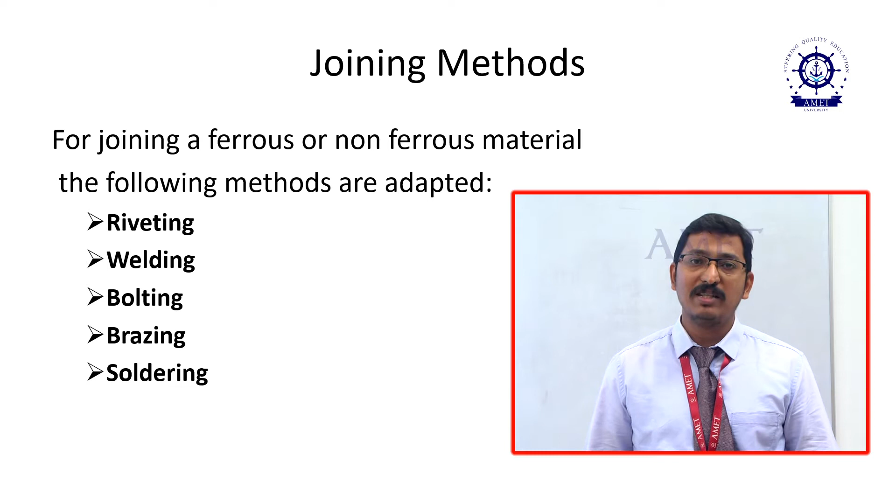Today we are going to talk about welding in shipbuilding. For joining ferrous and non-ferrous metals, we use different types of methods, such as welding, riveting, brazing, and soldering. In shipbuilding, the major common methods are riveting and welding. Before the 19th century, we were using the riveting method, where we overlap plates and use rivets to join two metal plates. But after the 19th century, we started using welding, which is predominant nowadays.

In riveting, the plates were overlapped where the rivets were inserted between the plates by drilling a hole. This is a more time-consuming process and takes more man hours. We were using rivets before the 19th century, and after that, we moved on to welding.

Welding has two methods. In the welding process, we join either similar or dissimilar metals using heat or pressure as a source. There are different types of welding. Before seeing that, we will compare the riveting and welding processes.

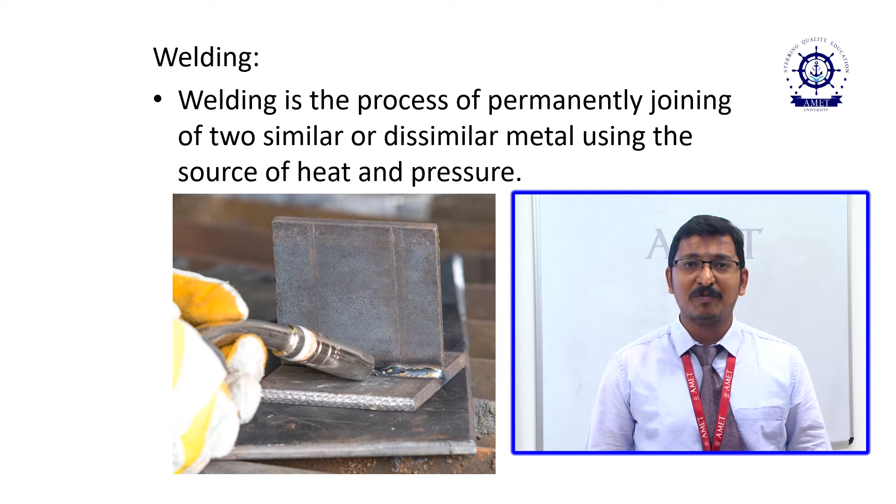In welding, unlike riveting, we do not require any connecting components such as gusset plates, so that we can reduce the weight of the plate. For doing welding, we require only one face. In case of riveting, we require at least two plates, two faces, and clearance between the weld plates.

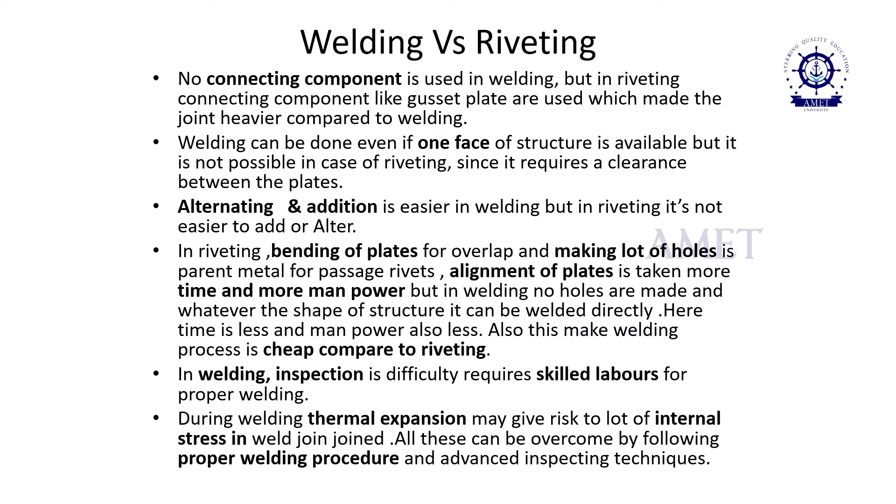So that you can do a riveting process. But in case of welding, only one face is sufficient, so you can weld in any different shape. And when you need to add or alter a weld plate, it is very easy compared to rivets.

But in case of riveting, we need to completely remove the rivet to do the alteration or addition. So for bending, making holes, and alignment, it takes too much time and more man hours, which increases the time and cost of building.

In case of welding, there is no need to make any holes, and it is less time-consuming for making the alignment. Thus, it reduces the time for joining of materials.

The next thing is, when you do inspection, compared to riveting, welding inspection will be tougher and more time-consuming, requiring skilled labor. So this is one of the most disadvantages of welding.

The next point is that thermal expansion in welding is more, especially in the weld area. To avoid this thermal expansion, we have to follow a lot of procedures. Once we follow the procedures to reduce the thermal expansion and stress over that particular area, welding is also an advantageous method for joining, especially in shipbuilding.

In welding, the major classification is solid state welding and fusion welding. When you see solid state welding, it is further classified into plastic or pressure welding and cold welding. Here the source of joining is heat and also pressure.

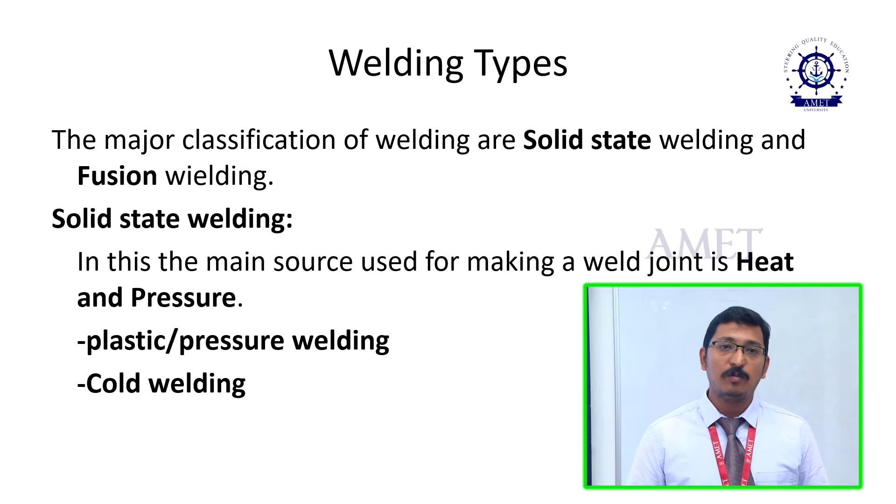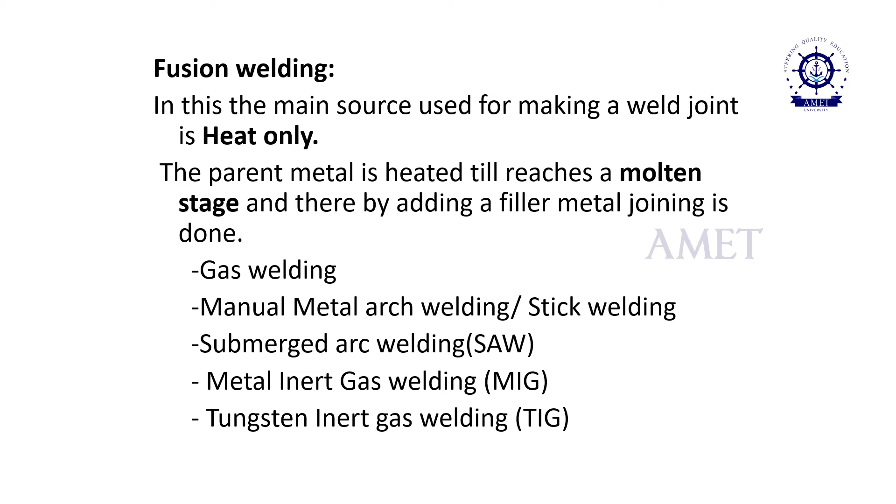As I told you, in shipbuilding, fusion welding is the most predominant method of joining we use. In this method, you heat the base plate till it reaches a molten stage, then by adding or not adding a filler metal, you can join two metal plates.

Further, fusion welding is classified into gas welding, manual metal arc welding, or sometimes called stick welding, then submerged arc welding, MIG welding or metal inert gas welding, then TIG welding, tungsten inert gas welding. These are the different types of welding we use in our shipbuilding scenario.

The first method we are going to see is gas welding. In this, the heat source is created by gas.

Generally two types of gas we are using, one is oxygen, another is acetylene. By varying the combination of these gases, we can produce three different types of flames: oxidizing flame, neutral flame, and carburizing flame. These are produced by varying the percentage of gases we use in our gas welding.

When you use a carburizing flame, you can weld some alloys such as aluminum alloys and steel alloys, these kinds of materials.

But using an oxidizing flame, you can weld something like brasses, bronze, copper. These are the types of metals where you can weld using the oxidizer flame.

Using a neutral flame, especially for shipbuilding materials, we can weld mild steel and iron. These are the types of metals we use for this neutral type of flame.

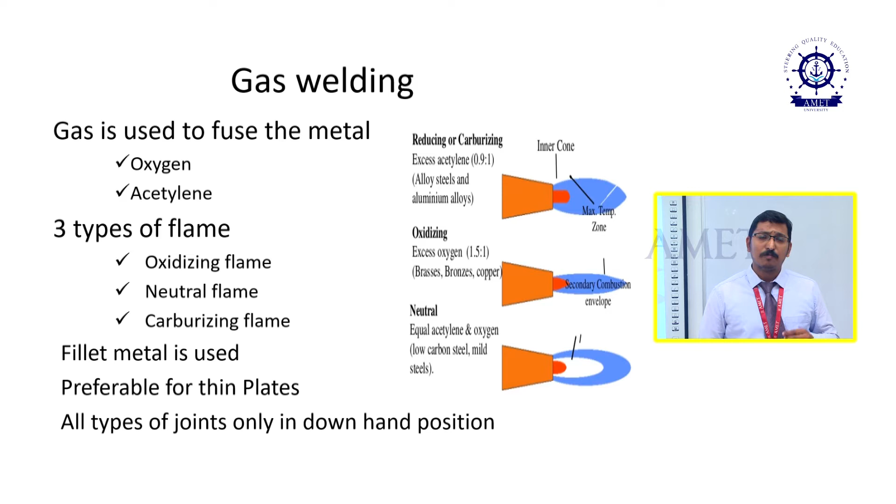We also use a filler rod for joining the metals. This type of gas welding is used only for thin plates.

The next type of welding we are going to see is manual metal arc welding. Generally we call it stick welding because we are using a single piece of electrode, which is also coated by a chemical.

This manual metal arc welding is a flexible method of welding used in shipbuilding, and it is completely manual, where the feeding of the electrode as well as the movement of the electrode is completely manual. So it is flexible, and it is one of the best methods of welding in shipbuilding.

The next type of welding we are going to discuss is submerged arc welding. The meaning of submerged arc welding is not that you are doing underwater welding. It means the arc is completely submerged into the flux. That is the meaning of submerged arc welding.

This submerged arc welding is fully automatic, where the movement of the electrode and the feeding of the electrode are both automatic. Also, compared to manual metal arc welding, a continuous coil feed of wire is supplied to the welding zone, so that you can continuously weld lengthy plates.

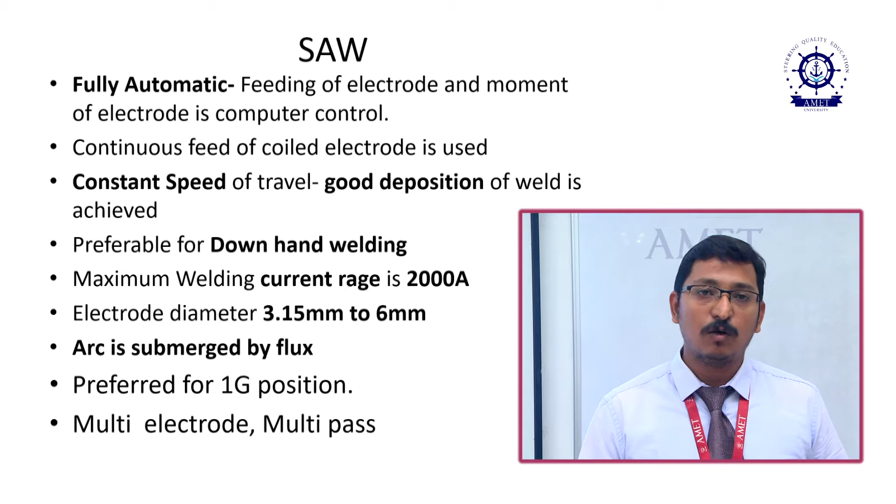That is the main advantage of submerged arc welding. Since it is an automatic type of welding, you can weld multiple passes in a single slot, which means you can weld continuously with different electrodes on the same plates. This is the main advantage of submerged arc welding.

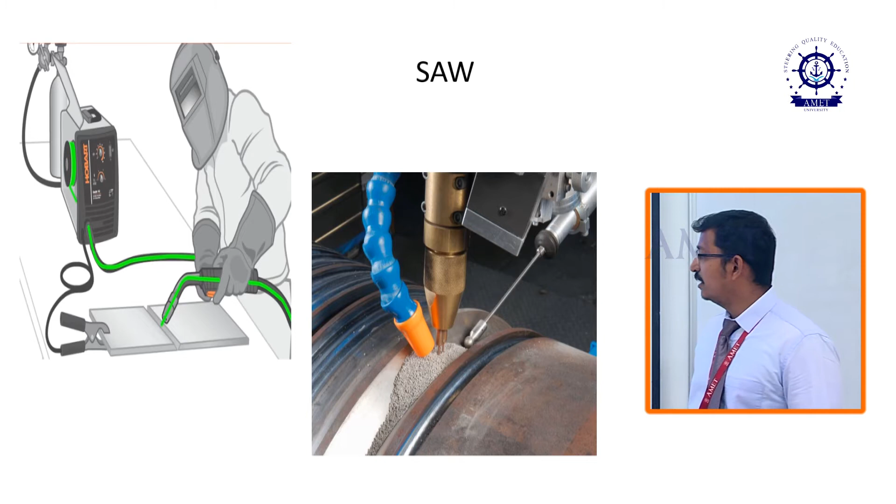Through this blue color tube, we can supply the granules of flux, and in between the center is the electrode we are using for submerged arc welding.

The primary purpose of flux is to prevent the weld bead from atmospheric contamination. The chemical composition of the flux present over the electrode will also help with arc stability. The amount of heat generation is directly controlled by this arc stabilization. The depth of penetration is also decided by the chemical composition used in the flux.

Then there's metal deposition rate, how fast the electrode is deposited inside the weld bead. Then positional welding capacity, at what position you are able to use this electrode. These are the various factors this flux influences directly.

For example, in different welding positions like 1G, 2G, 3G, some welding electrodes will support only 1G type of welding, while some other electrode types can support more than 2, 3, 4, or 5G. So this flux directly influences the metal deposition and penetration of the weld bead inside the plate.

The next welding type we are going to see is metal inert gas welding. By the name itself we can understand we are using an inert gas such as argon, carbon dioxide, or other types of inert gas to shield the weld bead from environmental contamination. This metal inert gas welding is a semi-automatic process where the electrode feeding is completely automatic, but the movement and travel of the electrode is manual.

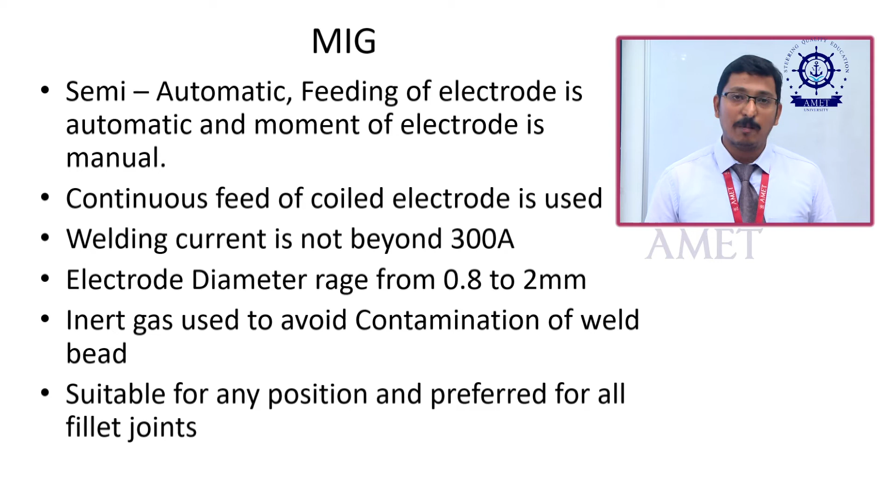The amount of current we supply for metal inert gas welding is about 300 amperes, and the filler or electrode rod diameter is about 0.8 to 2 mm. These are the metal inert gas properties.

The next type of welding we are going to discuss is tungsten inert gas welding. By the name itself we understand we are using a tungsten electrode, compared to MIG welding, SAW welding, or manual metal arc welding. In this type of welding the tungsten electrode can sustain a temperature of up to 3000 degrees Celsius. So the base metal will be melted, but the electrode will just be heated up. Generally we call this tungsten inert gas electrode a non-consumable electrode.

Tungsten inert gas welding is also a completely automatic method where you can weld different types of metals, not only mild steel but also aluminum, brass, and different types of similar and dissimilar metals. You can use inert gases like helium, argon, and carbon dioxide, but this method is comparatively very expensive compared to MIG, SAW, and other types of welding. But the only advantage in this welding type is that it is completely portable.

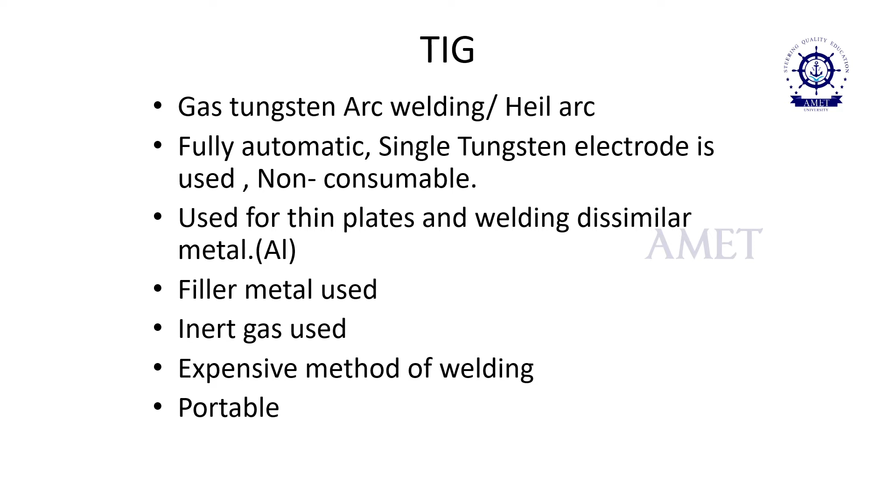When you compare all these types of welding—metal inert gas welding, tungsten inert gas welding, submerged arc welding, and manual metal arc welding—the best method we can suggest for downhand welding is submerged arc welding.

When you compare manual metal arc welding, that is metal stick welding, with submerged arc welding: in manual metal arc welding we use a single piece of electrode coated with flux, but in submerged arc welding we give a continuous supply of wire feed, which also has a chemical coat over the top layer of the electrode.

In both cases, current helps melt the electrode, and the base metal gets heated up so that the electrode melts and deposits over the base metal. This is the procedure in both stick welding and SAW welding.

When you compare MIG welding and TIG welding, in both cases we use an inert gas, whether carbon dioxide, helium, or argon. But in MIG welding we use a consumable electrode, while in TIG welding we use a non-consumable electrode. These are the main differences between these different types of welding.

Now we are going to look at welding positions. There are different types of welding positions we use. 1G is a downhand welding position where you hold your electrode towards the ground—consider this as the electrode, you are holding it towards the ground. This is the 1G type of welding.

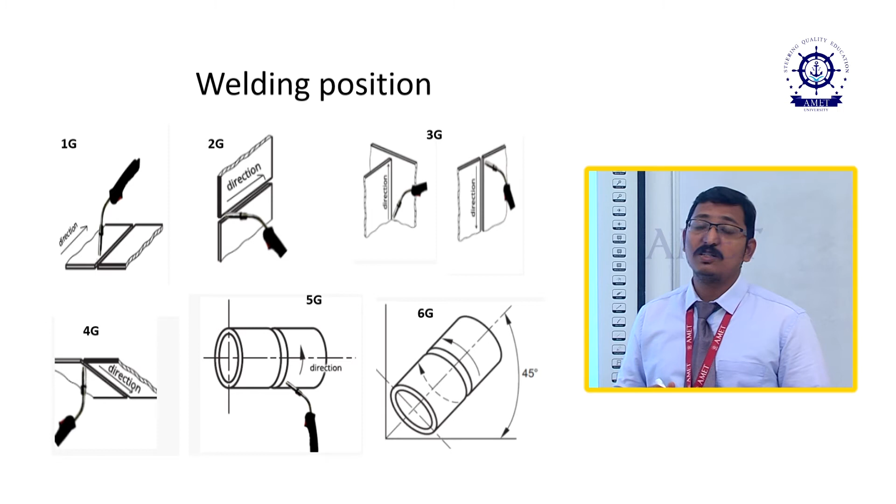So these are the welding positions we use in shipbuilding. Next, we are going to see welding joints. There are different types of welding joints, but the most used ones in shipbuilding are butt joint, lap joint, T-joint, corner joint, and edge joint.

A butt joint is where you do side-to-side welding, that is your butt joint. Lap joint is overlapping one plate on another, that you call lap joint. The third thing is T-joint, where you keep a plate perpendicular to another. And if only the corners are welded, that you call corner and edge joint. These are the different types of joints used in shipbuilding.

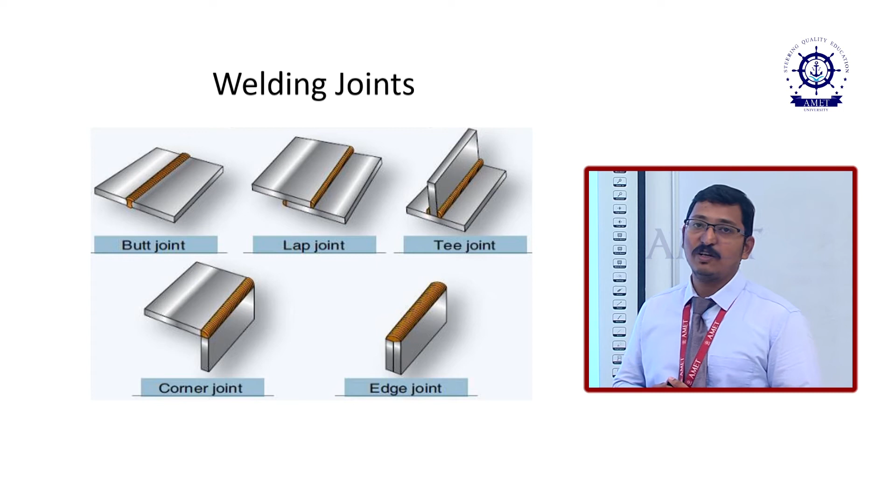At last, we are going to see about welding precautions. For any type of welding you take, you have to maintain a precaution. It can be gas welding, MIG welding, TIG welding, any type, but you have to take proper welding precautions for that particular welding type.

If you take gas welding, you will be having oxygen and acetylene cylinders. You should not keep both gases next to each other, that will also be a problem. You have to keep combustible materials away from the welding area so you can avoid a fire hazard. When you start doing welding, you should make sure a proper type-approved fire extinguisher is available near your area.

The next precaution is face shield. Either you have to wear glass goggles or a shield, so you can avoid the weld arcs and weld sparks. You should wear closed toe shoes so you can stay away from sudden shocks and impacts, and you have to wear ear protection so sparks should not enter your ears.

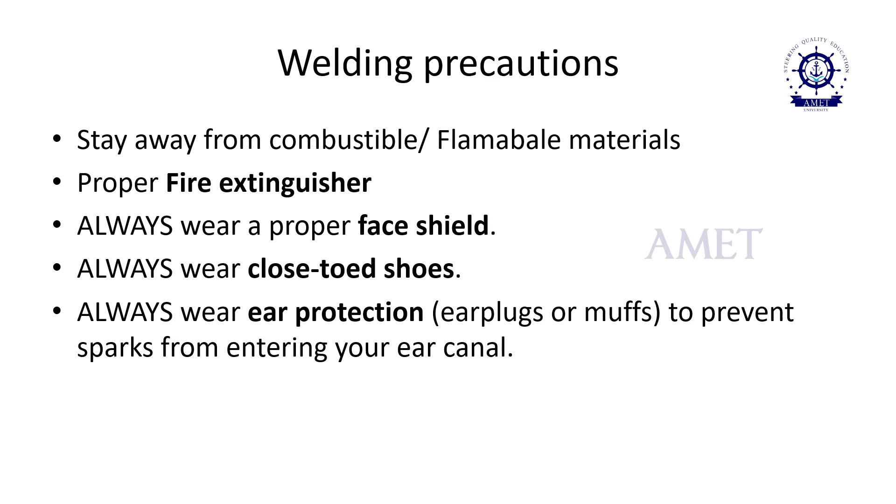So as of now we have seen different types of welding. Now we are going to see different types of welding defects, such as incomplete penetration, incomplete fusion, undercutting, porosity, spatter, and cracks, the different types of welding defects we are going to see today.

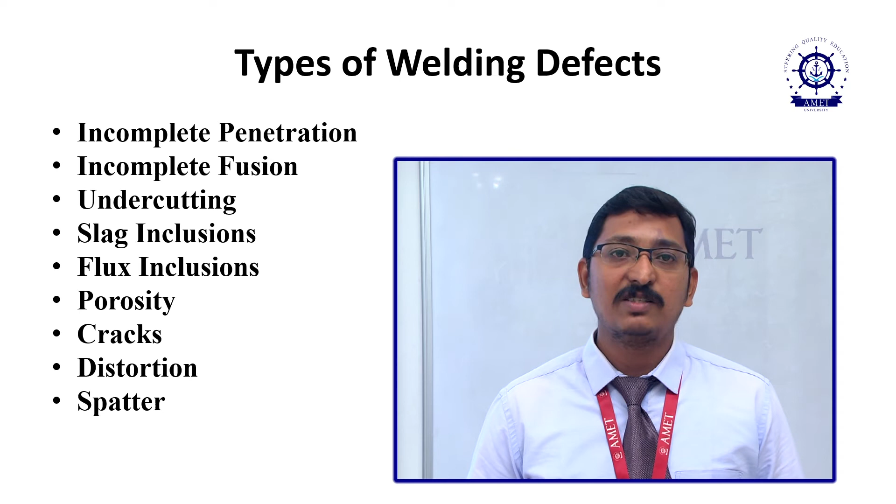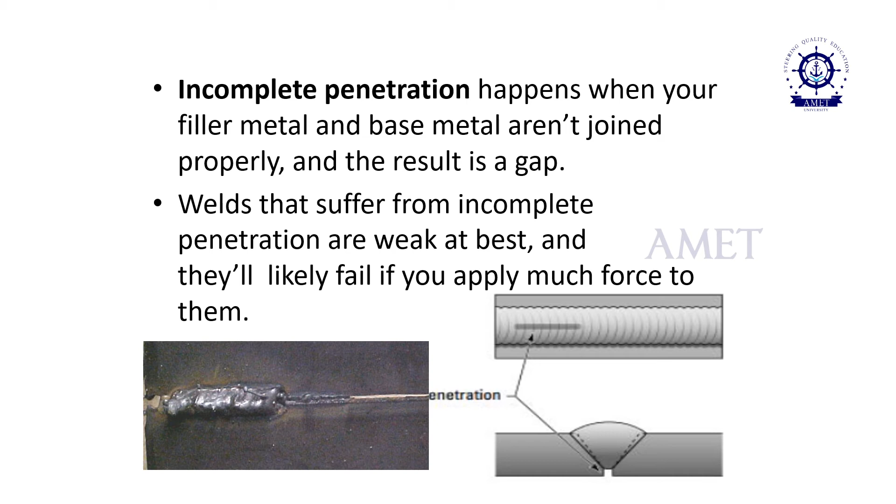The first defect we are going to see is incomplete penetration. In this defect, when you try to join both base metals, the filler rod does not directly penetrate till the bottom of your base plate, so there will be a gap. This kind of defect we call incomplete penetration. When you try to load an incompletely penetrated weld bead, it will result in a crack. This is called incomplete penetration.

The next defect we are going to discuss is incomplete fusion. In incomplete fusion, the base metal gets heated up and the electrode melts and penetrates till the bottom, but the joining or bonding doesn't happen - that is what we call incomplete fusion. The main cause is improper weld angle or improper selection of electrode, which results in incomplete fusion and incomplete penetration.

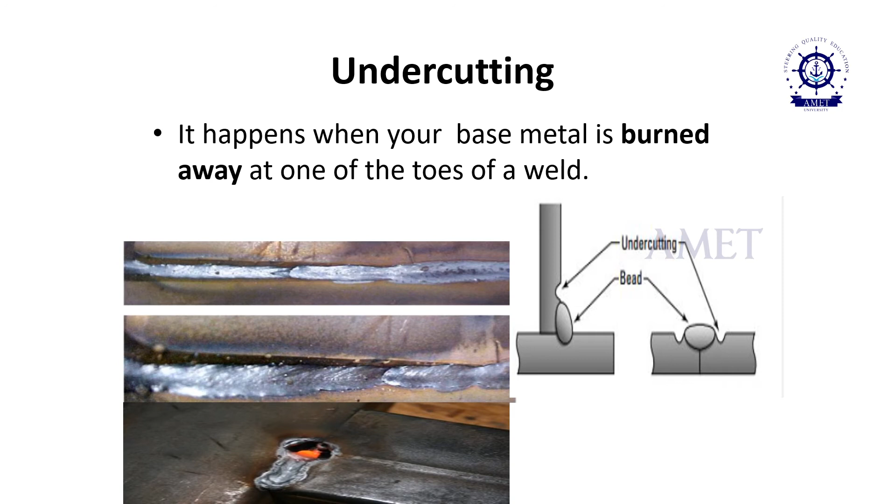Next is the undercutting defect. The main reason for undercutting is using high current, and also too much overlapping of the weld pass will result in undercutting. The meaning of undercutting is simply burning away your base metal, that's what we call undercutting.

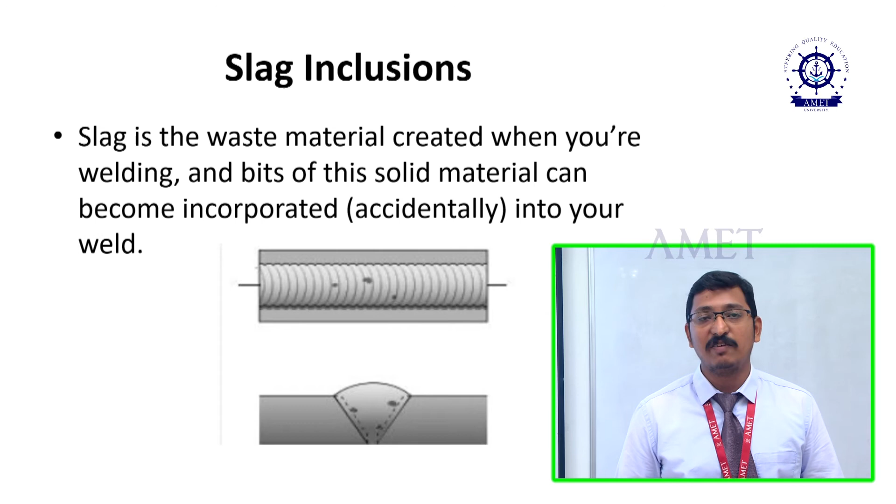Next is slag inclusion. Slag inclusion is an important defect in submerged arc welding or manual metal arc welding - these kinds of defects we can face. Slag inclusion is nothing but the flux accidentally getting incorporated inside the weld bead, that we call slag inclusion. Porosity.

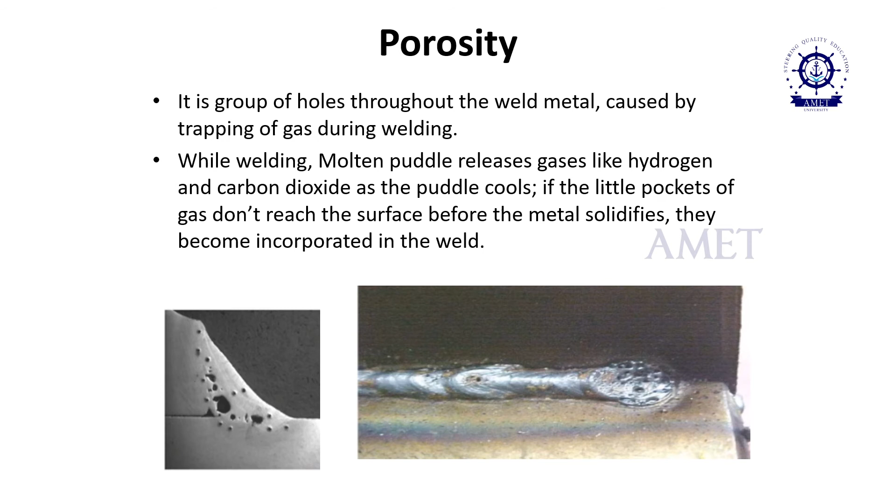Porosity is a group of holes you can see all over the weld bead. The main reason for porosity is when you weld, gases like hydrogen or others have to be released from the molten puddle, but instead get trapped inside the molten pool. When it tries to come out after solidifying, it creates a hole, and this type of pore we call porosity.

Next is distortion. When you can't control the expansion or contraction of your base metal, it will result in an ugly form that you call distortion. This distortion can be controlled by using tack welding, which is a discontinuous temporary welding. Another method is using clamps - by holding both sides you can control the distortion.

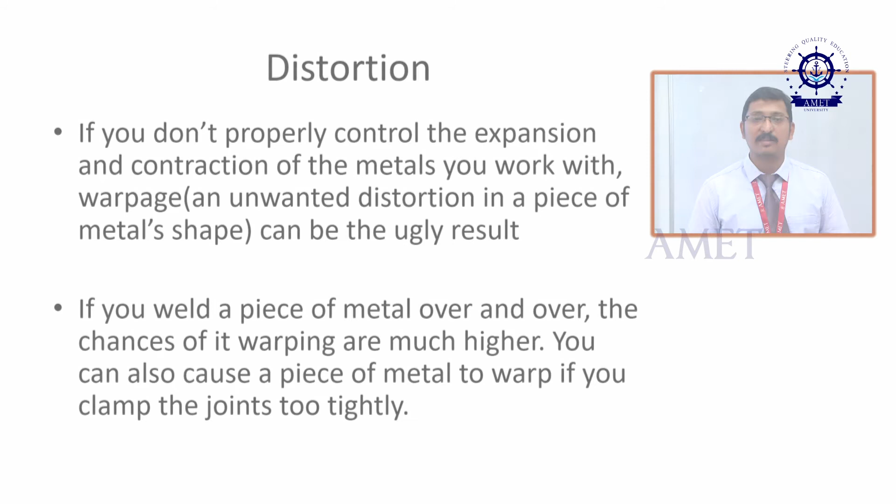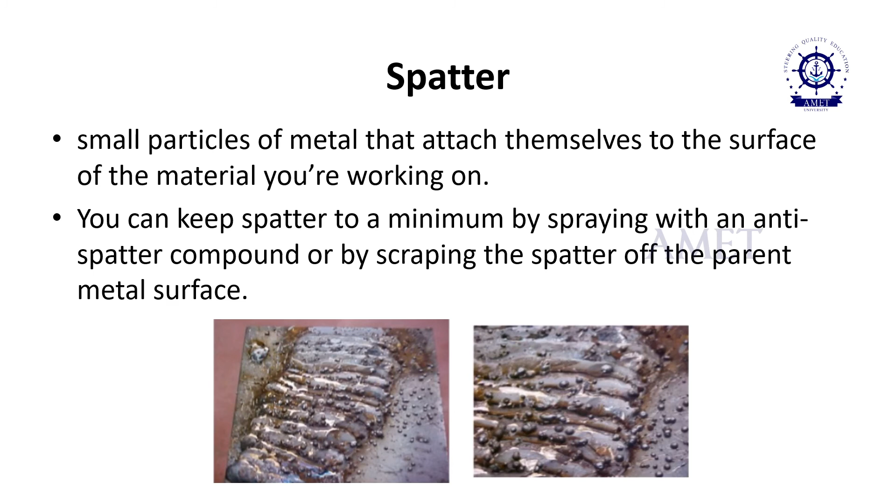The next welding defect is spatter. When you weld, because of high amperage or high weld current, there is a possibility of spillage of molten electrode over the sides of your weld plate, that you call spatter. This spatter can be removed by using chipping methods, or by using anti-spatter compounds.

So far we've discussed different types of welding. First, gas welding, where we use different types of gas. In that method, the base metal gets heated and you use a filler rod so you can do welding.

The next method we saw is manual metal arc welding. In that method we use a single piece of electrode which is coated with flux. That is the easiest and completely manual method we use.

Next method we saw is submerged arc welding. The meaning itself tells you - the arc is completely submerged, and this is completely automatic. The main advantage of submerged arc welding is that you can do multiple passes on a single plate - that is the main advantage.

Next welding is metal inert gas welding. In MIG welding, we don't use any flux on the electrode we supply. Instead we supply an inert gas - it may be argon or carbon dioxide. Generally we use this to avoid contamination of the weld bead.

The next method we saw is tungsten inert gas welding. In TIG welding, we are not using the electrode type we saw in submerged arc welding or MIG welding. Here we use a tungsten electrode which is non-consumable, where it can get heated up to 3000 degrees Celsius, by which the base metal gets melted. This is the main advantage of tungsten inert gas welding.